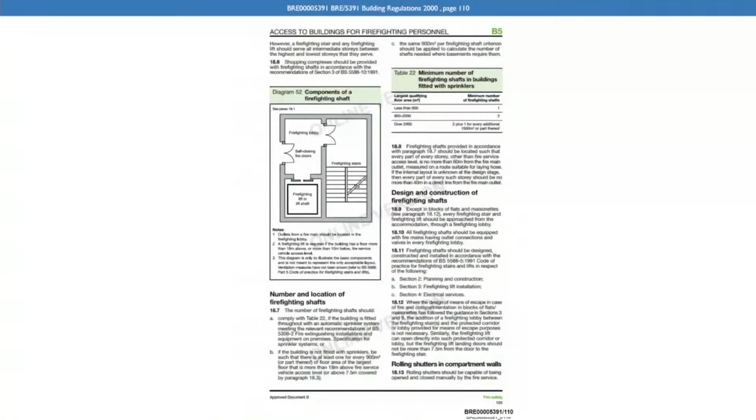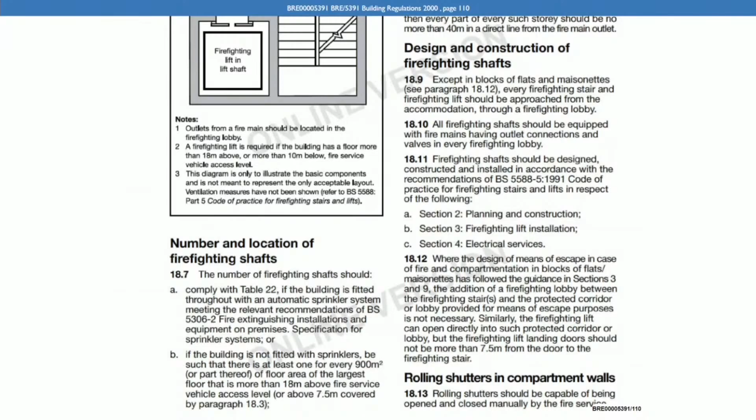Now can I turn to firefighting lifts and the relevant standards? Given your previous answer, you may not have seen this before, but could we go to Approved Document B, section 18.11, which can be found at BRE00005391/110. And now if we look on the right-hand column, just below the halfway point, you'll see section 18.11. And that states that firefighting shafts should be designed, constructed and installed in accordance with the recommendations of British Standard 5588-5 1991. Even if you had not seen Approved Document B before, were you aware of that requirement? Yes. Was that requirement well known in the industry to the best of your recollection? Yes, it would be, I would imagine.

Now, can I turn to BS 5588-5? It has a somewhat long title, which, just for the record, is Fire Precautions in the Design, Construction and Use of Buildings, Part 5 Code of Practice for Firefighting Stairs and Lifts. And if we can go to BSI00001721. Now, this was published in August 1991, and as its title suggests, it's a code of practice. If we can go to page 7 within this document, and section 1, clause 1. There we go. At the top left-hand side, you'll see under the heading Scope, it says this code of practice provides guidance for designers in providing firefighting stairs and lifts to assist the fire service in firefighting operations. Was that a document to which you had regard or reference during the course of the work at Grenfell?

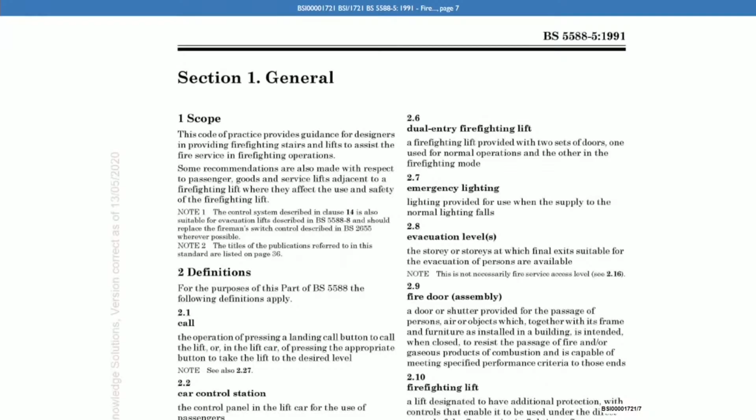That scope part is not something we would have adhered to in the Grenfell Tower project. Why is it not something to which you would have adhered for the Grenfell lift project? Because it was agreed that the lifts would not be firefighting, but would remain as firemen's lifts, from the discussions with David Steppel and John Rogers. Okay, we'll come on to that in due course.

Now, if we can stay on this page for the moment and look at clause 2.10, there we go, it's on the right-hand side under the heading Firefighting Lift, which is defined thus: a lift designated to have additional protection with controls that enable it to be used under the direct control of the fire service in fighting a fire. And note, the firefighting lift is a development of the type of lift known as a fireman's lift. Although existing fireman's lift installations may be replaced, fireman's lifts should not be used in new installations. Only lifts complying with this code of practice can be designated firefighting lifts.

Were you familiar with that definition? Yes, sir. Can you help us? What is the difference between a fireman's lift and a firefighting lift? Well, the firefighting lift has all the attributes that are described in this standard and that I described in my second witness statement. So the fireman's lift just had to conform to dimensional requirements and have a switch at the fire service access level which would be turned over and isolate the lift for use by firefighters.

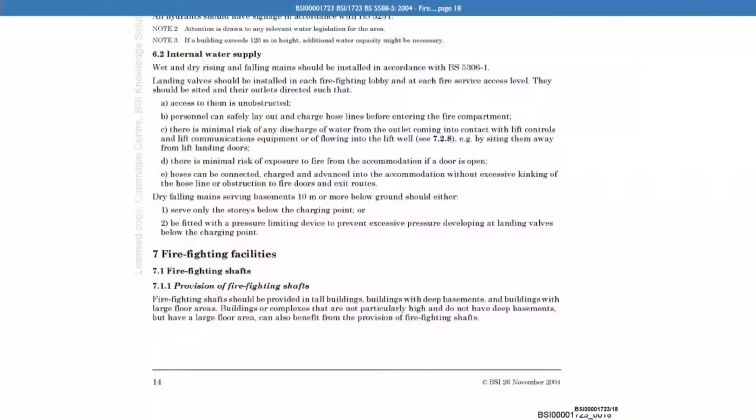If we could go to page 18 within this document, and the very bottom of that page, if possible. And we see there at the bottom clause 7, firefighting facilities, 7.1, firefighting shafts, and 7.1.1, provision of firefighting shafts. The standard says this, and I quote, firefighting shafts should be provided in tall buildings, buildings with deep basements, and buildings with large floor areas.

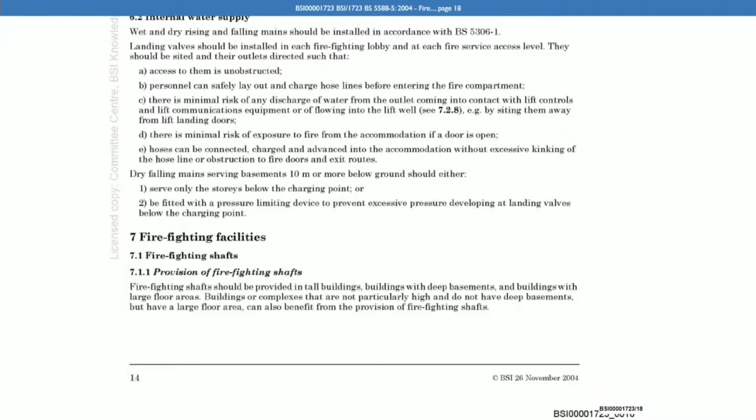And if we could hold that in mind, but turn over the page, we should see table 4, which is subtitled provision of firefighting shafts. And in the top row on the left-hand side, it says this, buildings or parts of buildings where the height of the surface of the floor of the topmost storey, excluding any storey consisting entirely of plant rooms, exceeds 18 metres, should be provided with firefighting stair, firefighting lobbies provided with a fire main, firefighting lift installation.

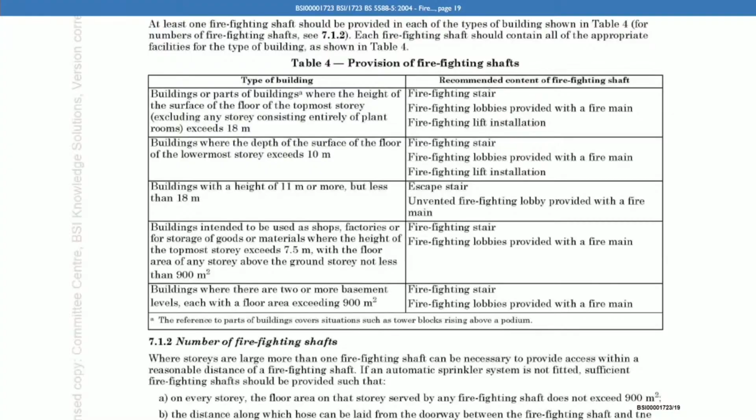Now, would you agree, and please say if you do not, that it is clear from this standard that new tall buildings, i.e. new buildings over 18 metres, should have a firefighting lift? Yes, sir. And would you agree that the rationale for installing a firefighting lift would apply equally to an existing building too, i.e. that it facilitated the work of firefighters in the event of a fire?

It's a difficult one to answer. It's not a thing that was the industry standard at the time to concern the design with changing what was there in that sense. Now, if we could look at that a bit further, where you do have a building such as Grenfell, where you had, as an existing building, existing lifts, are you saying that the industry approach would have been not to enhance the existing lift facilities at all?

I think in most cases that would be true. Again, we come back to this, unless you do everything, you can't call it a firefighting lift. So there is a theory that it can be confusing. There are some publications that have said if you cherry pick certain things that are appended to a fireman's lift, but not making it a firefighting lift, it actually causes confusion to the fire service. And they're better off knowing that it's either a firefighting lift or it's a fireman's lift, or they haven't got one at all.

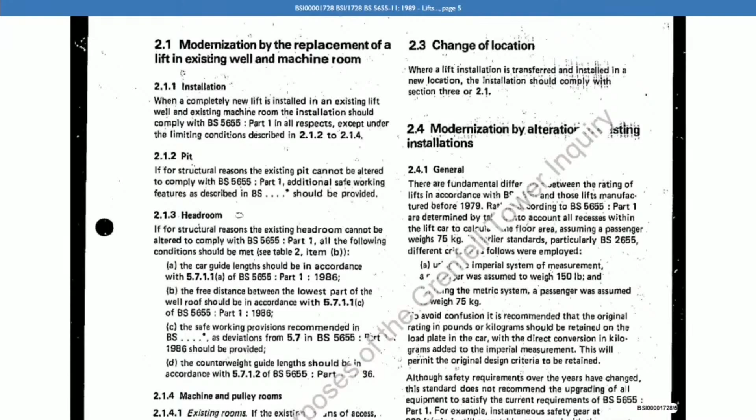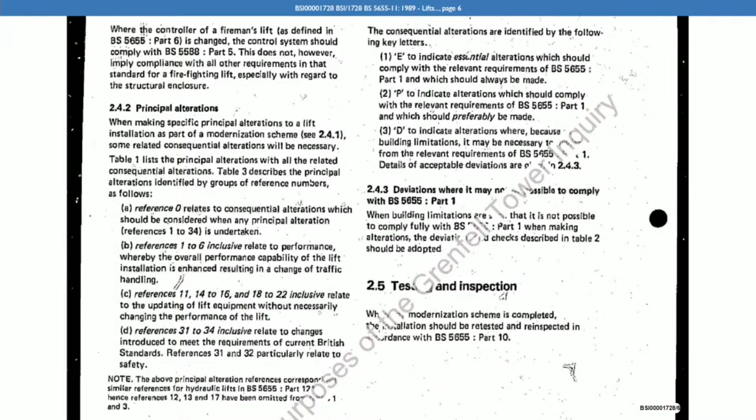Now, am I right in understanding that that meant that any new fire control system should comply with 5588-5? Yes. And that applied irrespective of whether the works were a modernisation or an installation of a new lift? Yes. And there's no caveat anywhere in the standard otherwise? No, I don't believe so. Now, could I draw the various strands we've been discussing together, and please shout if I've got anything wrong or you feel is too crudely summarised.

First of all, at the time of Project 1, in your view, did the relevant standards or any other legislation or guidance require the installation of firefighting lifts in new buildings? No. Oh, in new buildings? In new buildings, yes. Yes. Secondly, at the time of Project 1, in your view, did the relevant standards or any other legislation or guidance require the installation of firefighting lifts in existing buildings? No, they did not.

Did you consider that it was industry good practice to at least consider at development and the design stage whether as many of the features of a full firefighting lift could be installed in existing tall buildings such as Grenfell? No, we did not.

Is your evidence that, as a matter of industry experience, there would have been no consideration of such additional features, maybe not all of them, of a firefighting lift that could be incorporated so as to enhance the safety profile of the relevant lift? It didn't seem to be, well, it wasn't an industry typical standard. The industry would either completely convert or install in new buildings a firefighting lift, or refurbishment would be just a repetition of the fireman's lift.

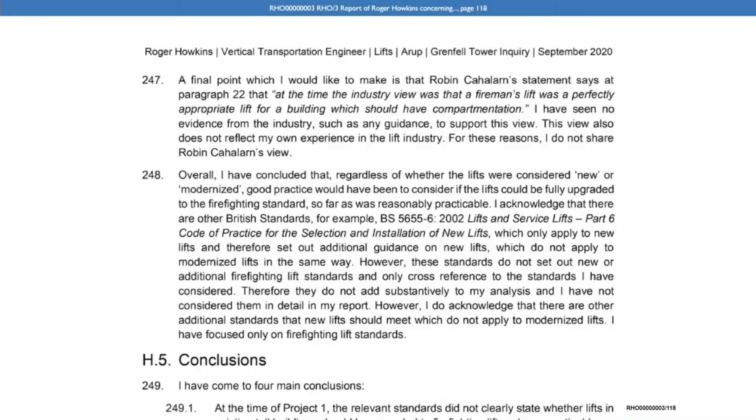Now, is it fair to say that you disagree with that conclusion of Mr. Howkins for the reasons you've just given? Yes, I do. Can I now turn to a separate topic, which is the scale of the project at Grenfell with which you were involved? And for this purpose, could I ask you to go to your first statement, which can be found at BUT quadruple zero.

Sorry to interrupt you, Mr. Kinnear. I think, if I've understood you correctly, Mr. Ellis, what you're saying is whether Mr. Howkins or anyone else would regard it as good practice, the industry didn't do it, and it wasn't industry practice. It wasn't generally industry practice, sir, no. Yeah. All right, thank you. Sorry, Mr. No, thanks, sir.

So we're about to go to your first statement, BUT quadruple zero 0040/4, and paragraph A12A, which is three rows down from the top of the page, and you say this: Butler and Young did not consider the two refurbished lifts as new lifts. Significant equipment was retained. Now, at paragraph 14 of your second statement, which can be found at BUT 0000055/5,

you say this, that Butler and Young considered that the two passenger lifts at Grenfell Tower comprised a refurbishment because significant equipment was retained. This retained equipment included guide rails, guide bracketry, counterweight and landing back boxes. From recollection, the term refurbishment was employed on every document throughout the project, close quotes. Now, probably useful to go to this. Could we go to paragraph 223 of Mr. Howkins' report, which can be found at RHO 00003/111.

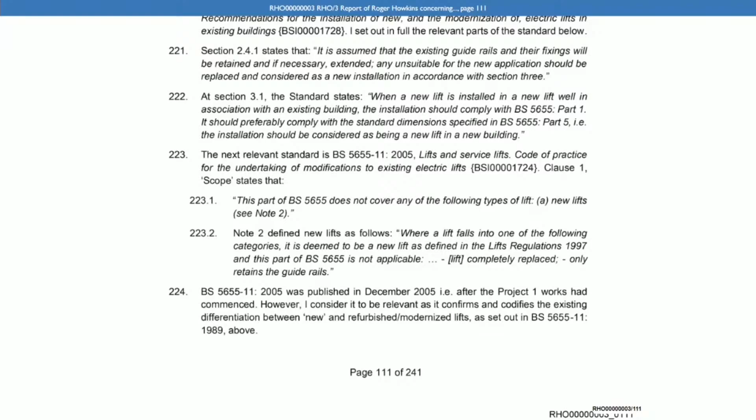Yeah, I understand that. And would you accept that is the definition of a new lift that was relevant here? Yes, I would accept that. Now, bearing in mind that definition, can we look at what work was done to the lifts at Grenfell Tower and see whether, and if so, to what extent it satisfies that definition?

Now, the project required the replacement of, amongst other things, the complete lift car, would you agree? Yes, it did. The counterweight? I'm not sure of the counterweight. I can't remember. Apex, in their returns, claimed they were going to retain counterweight. The car sling and platform? That was replaced. Safety gear? Yes. Door operator? Yes. Car doors? Yes. Landing doors? Yes.

The landing control system? By that you mean, when you say landing control system, you mean the push buttons and... Yes. Yes. Lift pit buffers? Yes. Electrical wiring? Mostly, I think. Yes. The lift controller? Yes. And the lift motor gearbox? Yes. So I think the only doubt you entertained there was over the counterweight. Is that a fair summary? Yeah. And the landing back boxes, which were retained.

Now, just following on from that, if we could turn to the specification, which we'll discuss in further detail in due course. If we go to BUT 0000044/12 and paragraph 1.3.1.

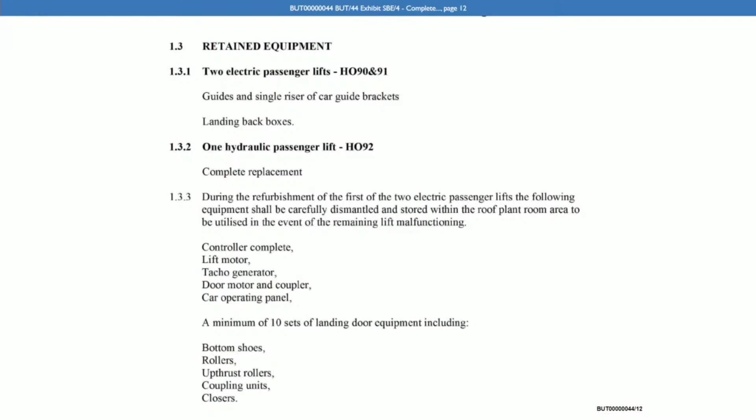Now, it's summarised there, the retained equipment as being essentially twofold. First of all, guides and single riser of car guide brackets and landing back boxes. Is that a fair summary of what was retained? That was what we suggested would be retained in the specification. Yes. And am I right in understanding that even though the car guides were retained, they were relocated to accommodate a larger car size? Is that right? Yes, they were.

So, certainly from the lay perspective, it would appear that the vast majority of the component parts of the lifts were actually replaced as part of Project One. Would you accept that proposition? Yes, I would. Would you therefore accept, and please shout if you do not, that the lifts ought to have been considered as new lifts, bearing in mind the definition we looked at earlier? I didn't think so. And can you help us as to why you didn't think so, given the scale of the change to the lift apparatus?

I always regarded it as a refurbishment. If the counterweight was retained and the guides and the bracketry and the landing back boxes, that was, in my opinion, a sensible definition of a refurbishment. And when you were looking at what the definition of a refurbishment was, is it fair to assume that you wouldn't have gone back to the relevant standards to see what the regulatory definition of a new lift was? No, I probably didn't. And you would have relied upon your own expertise and experience in the field? I would. Thank you.

Given the extent of the change to the, if I can call it the lift apparatus, would you accept that there was the possibility of an opportunity to upgrade the lifts and make modifications so that they had more of the features of a firefighting lift? It might have been considered early on, but as we've already said, the discussions with the TMO went differently.

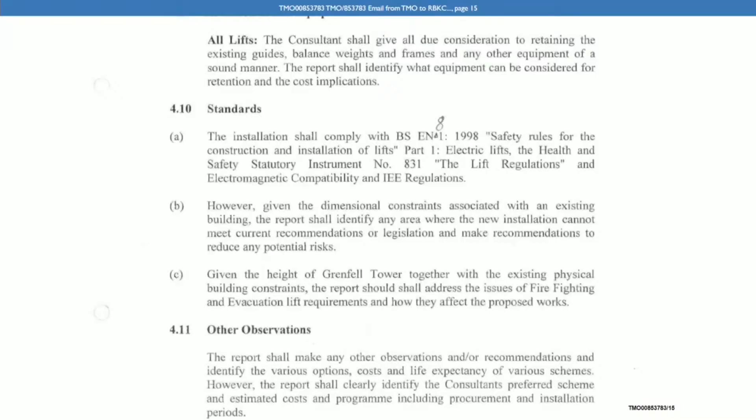Yeah. Now, bearing in mind your evidence that you say you have not seen that, was that nonetheless an instruction that was conveyed to you verbally? I can't recall, to be absolutely honest, on that particular issue.

Can you remember whether you produced any document or gave any form of briefing, verbal or otherwise, setting out the extent to which the new installation may not meet applicable standards and what could be done to mitigate any risks arising? I can't remember doing so, but the scheme did involve the mitigation of such shortcomings as over travel and pit depth, because we were increasing speed.

Looked at differently, was it your normal practice when dealing with work to lifts in existing buildings, would it have been your standard practice to have advised the client of the relevant standards and the extent to which works may not meet the relevant standards? I would say so, yes. And did you do that at this project? I can't recall, to be absolutely honest.

Now, given the height of Grenfell Tower, together with existing physical building constraints, the report, I'm looking at subparagraph C now, the report shall address the issues of firefighting and evacuation lift requirements and how they affect the proposed works. Now, looking at subparagraph C, would you agree that that is crystal clear, that the brief required the consultant's feasibility report to address the issue of firefighting and evacuation lift requirements and how they affected the proposed works? Yes, I see that was the instruction on the brief for the feasibility study.

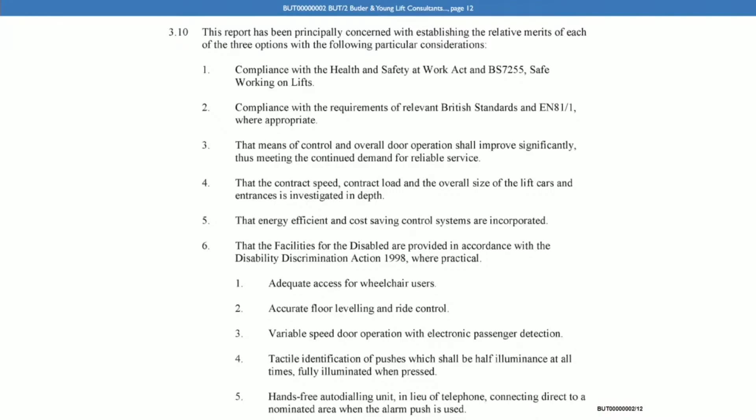scope is reiterated, and it states this report has been principally concerned with establishing the relative merits of each of the 3 options with the following particular considerations: compliance with the Health and Safety at Work Act and BS 7255, safe working on lifts; 2, compliance with the requirements of relevant British standards and EN 81/1 where appropriate. Would you agree, or at least take it from me, that there's no reference in section 3.10 to BS 5588-5? There is none, no, that's correct.

And equally, there's no reference there to BS EN 81/72/2003. Also correct. Would you consider those to be significant omissions, or in your view, do they reflect the instructions given by Mr. Steppel to your Mr. Moorhouse? They reflect those instructions exactly, even to the option appraisal, which in a one-liner mentions fireman's control. There is no, you can take it from me, there is no reference in the feasibility report to an instruction from Mr. Steppel that firefighting lifts were not to be considered.

First of all, do you find that omission surprising, given the clarity of the instruction that's said to have been provided? No, I think what would have happened had the instructions still been in place to complete the feasibility study of upgrading, I'm pretty sure that they would have thrown it back at us, that we would have had that report rejected for not dealing with that aspect.

And just flowing from that answer, and just to give you the opportunity to answer a criticism that's made of Butler and Young by Mr. Howkins, could we go to his report, which is at RHO000/3/122 and paragraph 261. Now it says there, if we could amplify that paragraph, 261. The report, he's talking about the feasibility report here, should have included an analysis of whether it was reasonably practicable to bring the lifts up to full firefighting lift standard, and if not, why not?

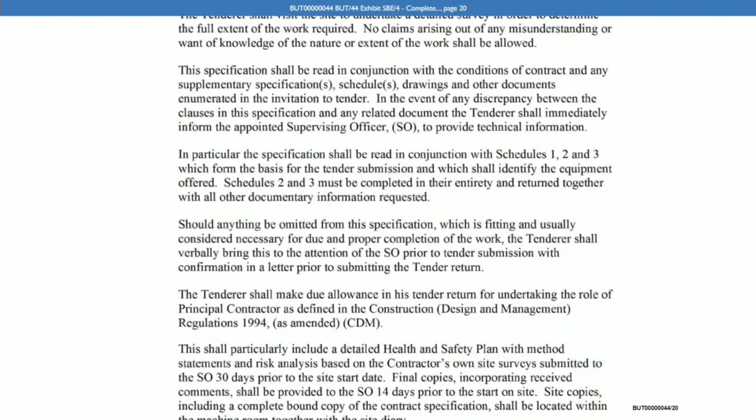Can you help us? What do the initials SO indicate? Is it supervising officer? Supervising officer. And were you the supervising officer? Well, Ian Moorhouse was the supervising officer in general terms, but I became the supervising officer. And insofar as you can remember, the TMO never wrote to you saying, why aren't you advising us about firefighting lifts? No.

Did any tenderers bring the absence of firefighting lift features in the specification to your attention? No, sir. No. Not that I can remember. To the best of your knowledge, can you remember any Mr. Moorhouse saying that tenderers had raised the question of firefighting lifts? I can't recall any such.

Could I ask you to stay in this document, but go to page 22? And it's really towards the bottom of the page at paragraph 2A.05, which is under the heading Regulations. And it says there, it shall be understood that the equipment specified and that the characteristics of the site, particularly dimensions and clearances, may not fully comply with current British and European standards, and these shall be qualified by the tenderer in the tender return.

For those purposes, would the reference to British and European standards have included those concerned with firefighting lifts? No, not necessarily, I believe. That was referring to what I spoke about earlier, was the dimensions and clearances, largely because of the increased speed.

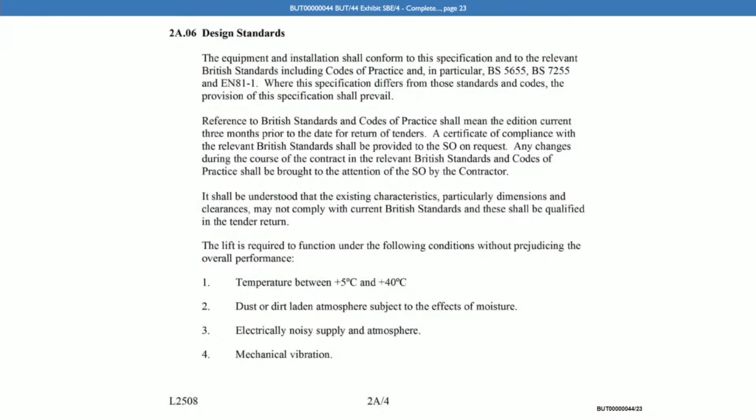Can you remember now, was a certificate of compliance with relevant British standards ever provided to the supervising officer? Not that I can recall. Would you necessarily have seen that, or would it have been something really for Mr. Moorhouse rather than you? I really can't say. I didn't see that. I can't remember seeing such a document.

Could we turn over the page to page 24? Now we see here in paragraph 2A.07 related documentation and references, and it says this tender documentation shall be read in conjunction with, and its requirements are in addition to, the general conditions of contract and any drawings and other documents issued with it and listed in this invitation to tender and as set out below. Now, what's set out below in somewhat torrential form is a series of British standards and indeed references to various bodies such as the London Fire Brigade.

Would you accept that by 2004 some of the legislation in this list had in fact been repealed? For example, the Factories Act 1961. Yes, I would. Could we look at, if we can go to the bottom of the page and the fourth entry up from the bottom. Now there's a reference there to 5588, Fire Precautions in the Design, Construction and Use of Buildings. It doesn't specify which part and which year the edition of that standard that's been referred to. Would you accept, therefore, that the reference to BS 5588 is unclear in that respect?

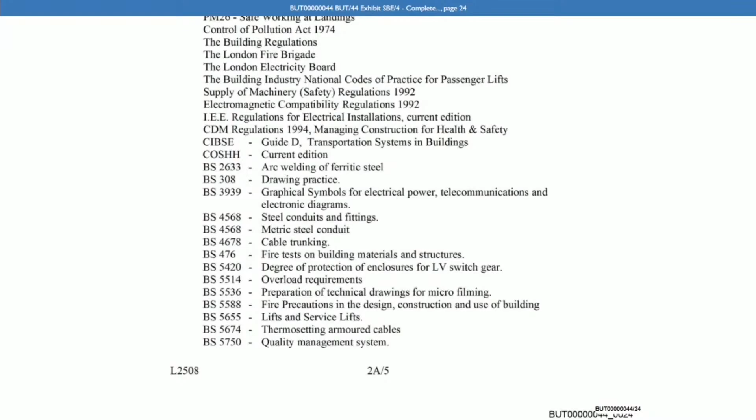It is unclear, albeit the only component or element of the specification that would need to comply with 5588 would be the control, which was specified in 2A70, I think. Yeah. And that does, as far as I'm aware, comply with 5588 because the embedded software that the contractor provides in his control panel will be suitable for firefighting lifts, and therefore that's why we changed our clause to reflect the fact that the control that was being provided was compliant with 5588.

I suppose the issue that immediately rises out of that answer is that that narrow reading is not reflected here, is it, in the broad reference to BS 5588? No, to be fair. And so, absent any qualification, the broad reference to BS 5588 implies that firefighting lift standards should have been considered. Would you accept that? No, I don't think so. Only in what was actually specified. As you say, the specification takes preference, and the specification defined it. So it was only referring to having to comply with that standard as far as the clause that was relevant was concerned. That doesn't sound too silly.

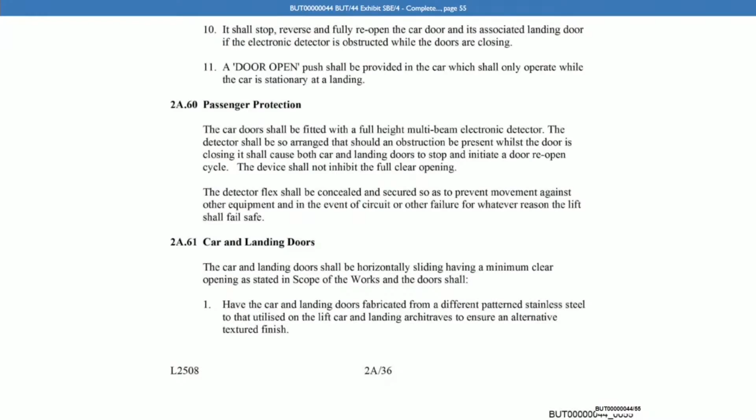And we see at the bottom of the page there, the specification starts for landing doors, and it goes over the page. There are some 16 individual features that are identified, none of which is prescribing that the doors be of a certain fire-resistant quality and for how long. Now, was that an assumption that such doors would be provided so that it doesn't need setting out? It was probably my concerns over how we would achieve the fire assessment.

Fire-rated entrances were provided with a small frame 50mm trim. To obtain the fire certification of that door, you would have to butt the full-depth architraves against these small frame trims, which we didn't want to do because we considered it a pinch point or an attack point, as well as being possibly not so aesthetically pleasing. So the full depth architraves were wrapped round the small frame trims, and then we required a letter of assessment from Warrington Fire, which I remember chasing Apex for. They sent me a copy, or gave me a copy, I can't remember which.

But that was, if you like, the development that we did with the successful contractor. And so, although it's not mentioned in the specification, it's something that was installed because of concerns you entertained about fire resistance. Yeah. Thank you. Can I now turn on to the question of the fire control switch itself? If we can stay in this document, the specification, but go on to page 60, and clause 2A.70.